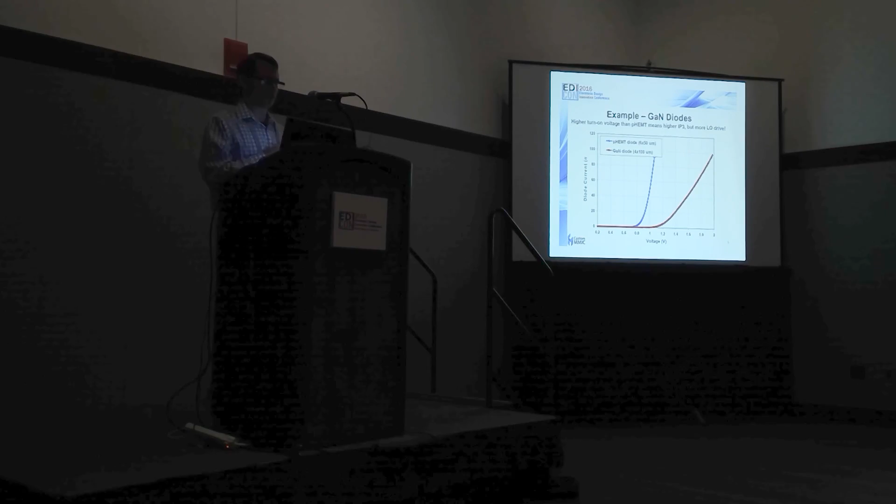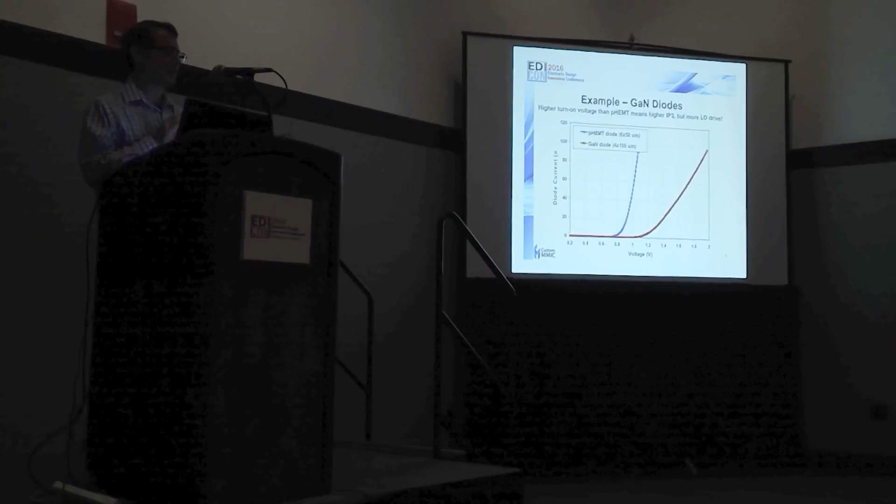So, one question briefly is, why is gallium nitride so much better than what we're used to, which would typically be GaAs PHEMT in the III-V world? As an example, take a look at the typical IV curve of some diodes, and we can see some physical reasons why GaN is so much better. On this IV curve, the blue one is a typical PHEMT diode. This is a 300 micron device that we put through the IV tracer. It has a turn-on voltage of about 0.75, 0.8 volts, where the current really starts going through the diode. That's fairly typical of most PHEMT processes. You can move that turn-on point a little bit, but you're pretty much around 0.6, 0.7, 0.8 volts.

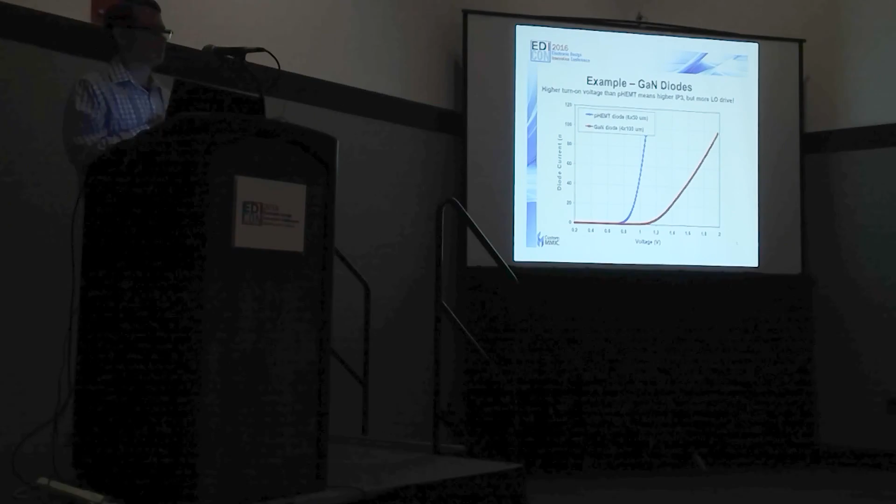GaN, on the other hand, is a little bit higher. The red curve represents a typical GaN diode from one of the processes we use. This is a 400 micron total periphery. Both of these are fairly big, but chosen just to give nice current values. This one turns on around 1.1 volts, so about 30 or 40% higher than a typical PHEMT diode. The GaN will turn on, and it has a much different slope. So the diode, from a physical perspective, looks a lot different. From an electrical perspective, there are some differences going on here. It's not just a slightly tuned GaAs diode. It is really its own unique element.

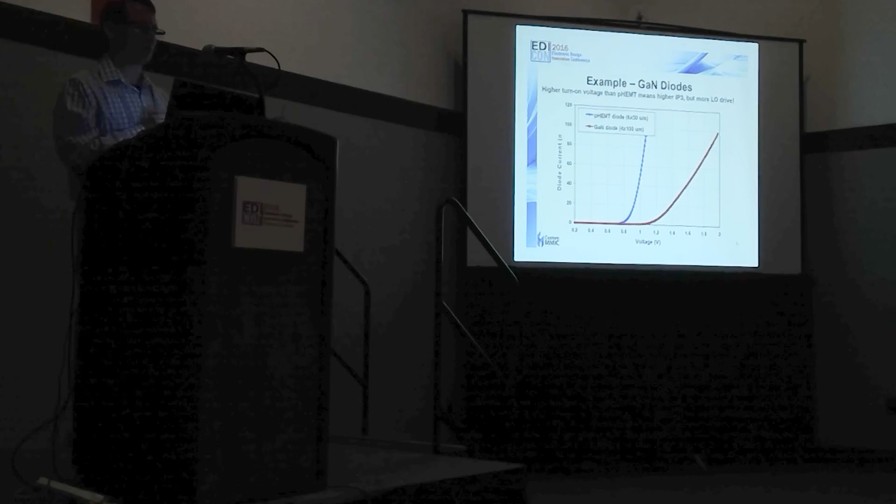And the higher turn-on voltage, we'll see, does lead to higher IP3, but it also means more LO drive. So nothing is free, and certainly in gallium nitride, that is where we pay the price. It's the LO drive.

So a few months ago, back at the IMS in San Francisco, I was fortunate to give a MicroApps on some of the GaN mixers we've done at Custom MMIC, and that was really our second generation GaN mixers where we got input IP3 levels around 30 to 33 dBm pretty consistently. I'm happy to say that what we'll be looking at here today is our third generation set of designs, and we've really exceeded that IP3 level by quite a bit.

So again, the results here have not been shown outside. This is not really just a repeat of the MicroApps. This is some brand new data. And I'd like to take a look at really 3 examples of some mixers we've done on this third generation. The first is an S-band FET mixer using the 3-terminal device, the cold FET. The second is an X-band double balanced diode-based mixer. So again, looking at a 2-terminal device.

And then finally, a high-frequency Ku-band GaN FET mixer, again, using the 3-terminal device. So we have two 3-terminal devices and 1 diode-based mixer. And these were all fabricated on the same process. This is a US-based commercial GaN process.

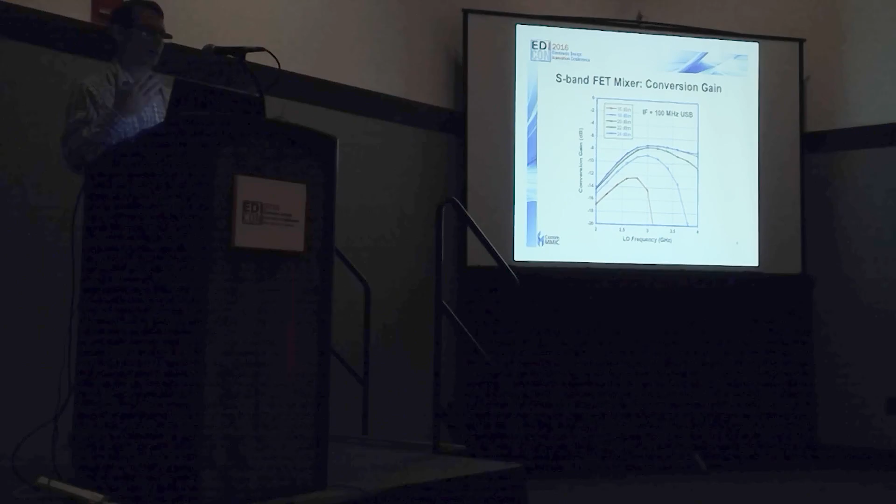And we approach conversion gain levels of about 7 or 8 dB, which is quite commensurate with what you would see in a GaAs pHEMT design. So we're not losing a lot in terms of conversion loss by going to GaN. But the one thing we do see is we need quite a bit of LO drive, whereas a typical GaAs passive mixer might need 15, 18 dBm. We are well above that. And indeed, this mixer saturates above 20 dBm LO drive. So we need some power. That is the trade-off we make with GaN, but the hope is that we get a little bit more efficiency.

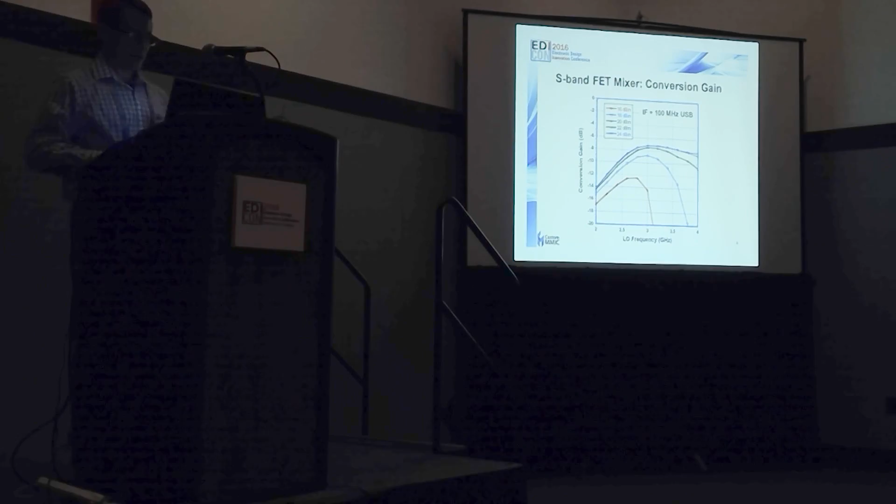So in terms of how we did there, if we look at the input IP3, this is the same idea, down converter, a fixed IF of 100 megahertz, upper sideband, sweeping the LO frequency and looking at a bunch of different power levels. We see that our input IP3 is quite high, between 35 and 40, sometimes eclipsing 40 dBm, across the 1 gigahertz bandwidth, which is very nice.

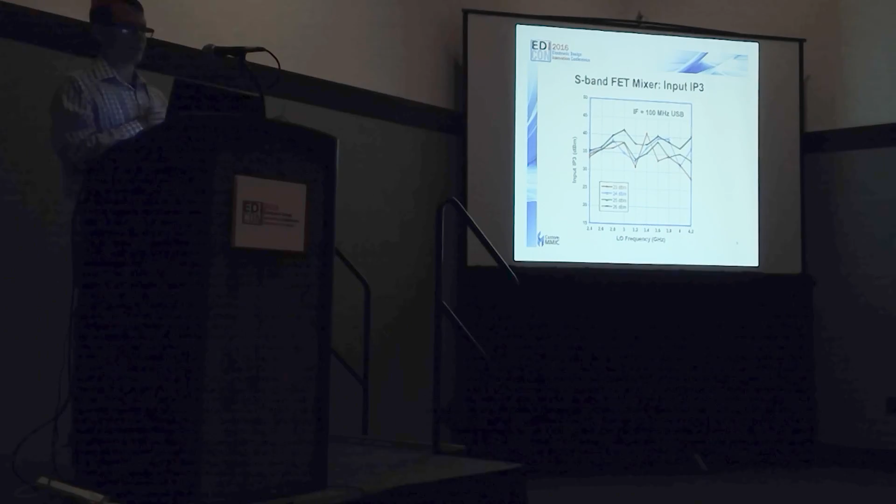And if we think about linear efficiency, for most mixers the input IP3 is around what the LO drive level is, maybe a couple dB higher. Here our IP3 is about 8 to 10 to 12 dB above our LO drive. So we've got some nice linear efficiency going on. So we do have to drive this mixer quite hard, but we get the benefit back of very, very high input IP3s. It's always a trade-off, but that's a nice trade-off to have. Yes, we've increased the LO drive, but we've gotten a lot more bang for our IP3 buck.

So the second one to look at is an X-band double balanced diode mixer. This was designed really to cover an RF bandwidth of about 7 to 13 gigahertz with an IF response, again, DC to 1.5 gigahertz for this particular project.

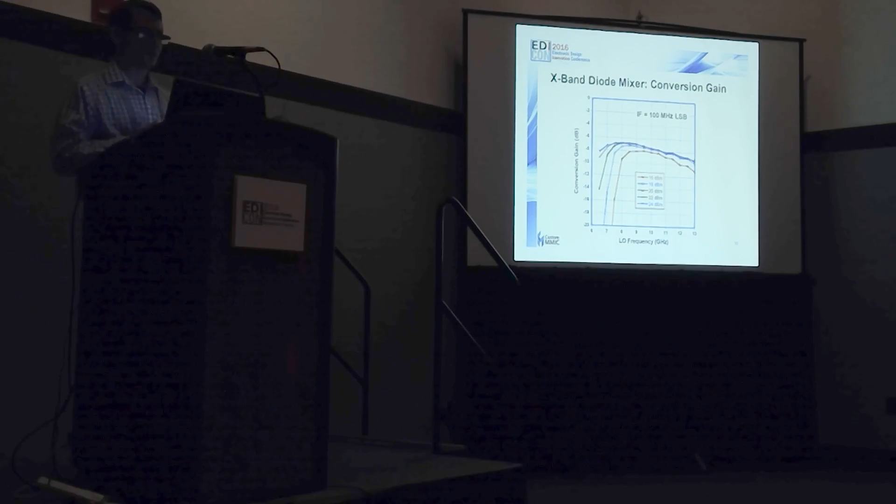But what we do notice, again, our conversion gain saturates at much higher LO drives than we're typically used to seeing for a GaAs pHEMT-based passive mixer. We have to drive this about 20 dBm or higher to get the nice flat saturated conversion gain. So with the FET, we saw a high LO drive, and the same thing with the diode, but we expected that, and the hope is that we did get some payoff. And indeed, in terms of the input IP3, the linearity, we did see that payoff.

So here, again, same conditions, sweep the LO frequency, fix the IF at 100 megahertz lower sideband for a down converter. What we see for our input IP3 is typically between 30 and about 38 dBm across the band. We get a nice about 2 gig bandwidth where that IP3 really peaked up. And if we drive it at 26, 27 dBm, we're approaching 40 dBm input IP3 for a diode mixer,

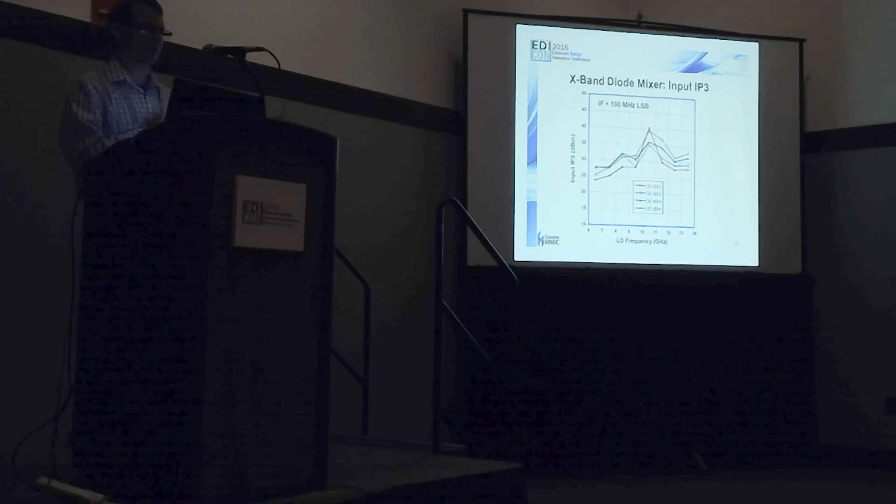which is very good. It's obviously not across the full band, but this, like I said, was our third generation, and we've increased this from our second generation by about 8 dB. So the hope is to flatten this out and get this even higher, but it's certainly a nice start.

So there's no balance here. There's no transformers. We got rid of the spiral transformer diplexer and just went with a low-pass, high-pass filter kind of diplexer. And that's really where we get our isolations from. There's no inherent balance here, so isolations are really provided by those on-chip elements, the spiral inductors and the capacitors.

So first, to take a look at the bandwidth, again, we have the conversion gain here as a down converter, sweeping the LO 13 to 19 gigahertz, 100 megahertz IF frequency upper sideband. And what we see is when we get up to finally close to being saturated, we're getting about 9 or 10 dB conversion loss, so a little bit higher than the previous two mixers.

And that's really a consequence of having to use a smaller device at these frequencies. As the frequency goes up, these mixing devices want to get smaller to handle the bandwidth, and when they get smaller, they have higher resistance values, so that comes into play here with the conversion gain.

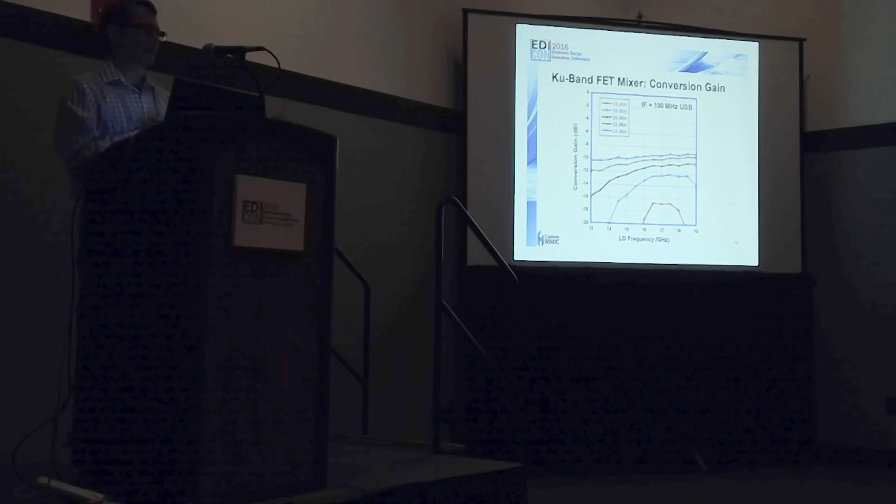But we do see that very nice flat response as we drive it hard enough. We drove this up to 24 dBm. I would have liked to have gone higher, but our lab equipment kind of stopped there. So generating power at those frequencies in the lab can always be a challenge. So I think if you could drive this a little bit harder, maybe up to 27 dBm, you might get flat 8.5, 9 dB conversion loss across the band. But we certainly have not

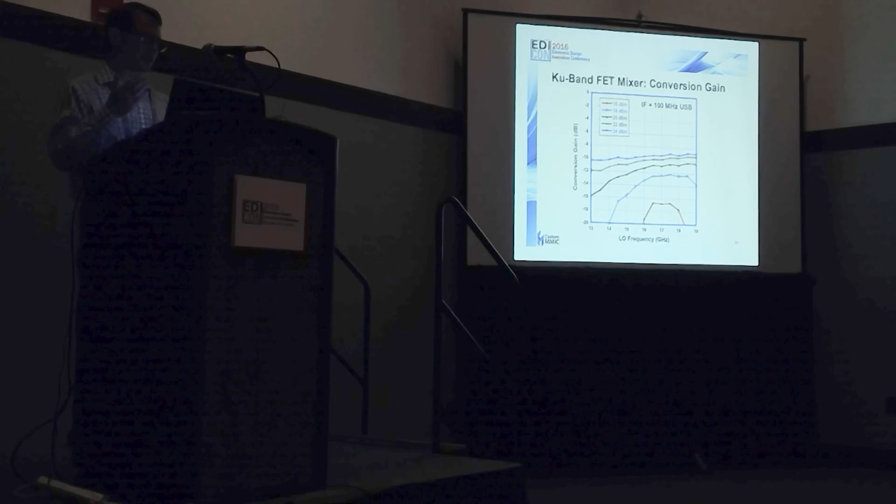saturated this. Then in terms of the input IP3, we see a very similar looking curve to the conversion gain, again over the same LO frequency range. As we drive it harder, that input IP3 just keeps creeping up to about 33 to 35 dBm across the band, giving us again a nice linear efficiency of about 8, 9 dB above the LO drive. So again, driven pretty hard at 26 dBm, but we get a lot of bang for that. We get up to 35 dBm for an input IP3.

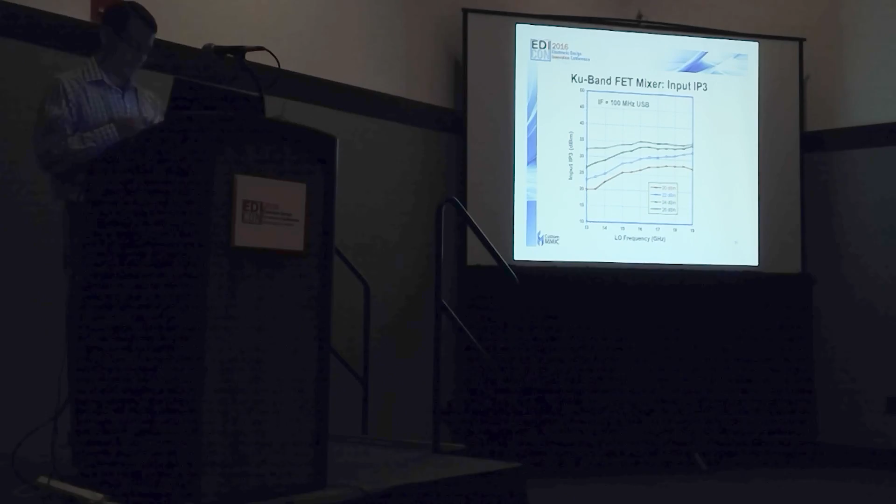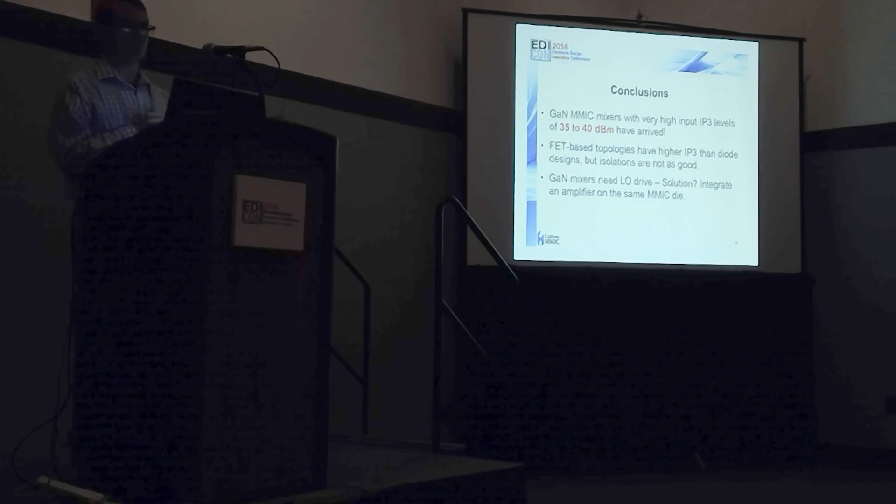So again, in conclusion here, what we like to think is that GaN has really offered passive mixers the chance to reset the bar for what input IP3 levels can be expected. About 10, 15 years ago, when I was designing mixers, the goal was really to get to input IP3s of 30. And a lot of people have done that, and now really what we hear a lot is, can we get to 40? 40 is the new 30. And we think the way to get there is with passive gallium nitride mixers.

In general, the FET-based, the 3-terminal mixing devices have higher IP3 than the diode designs, but the trade-off, again, is in isolations, which I didn't get to show, but I certainly have lots of data showing that the double balanced has the best isolations. It has a lot better spur performance, but the FET one will give you that raw intermodulation performance, which, again, in some applications, that's what you care about most.

So we mentioned everything comes at a price, and for the GaN mixers, the one thing they do need is LO drive. So the solution, which we're working on right now, is to take advantage of what the GaN process offers us, and that is a chance to make power amplifiers. So the idea is really to take our mixer and take a power amp or driver amp and marry the two up and generate a mixer that has reasonable LO drive levels, some on-chip amplification, and then the very high input IP3s. So that's kind of the next place to go. It's the next logical progression. And someday, maybe we'll say 50 is the new 40.

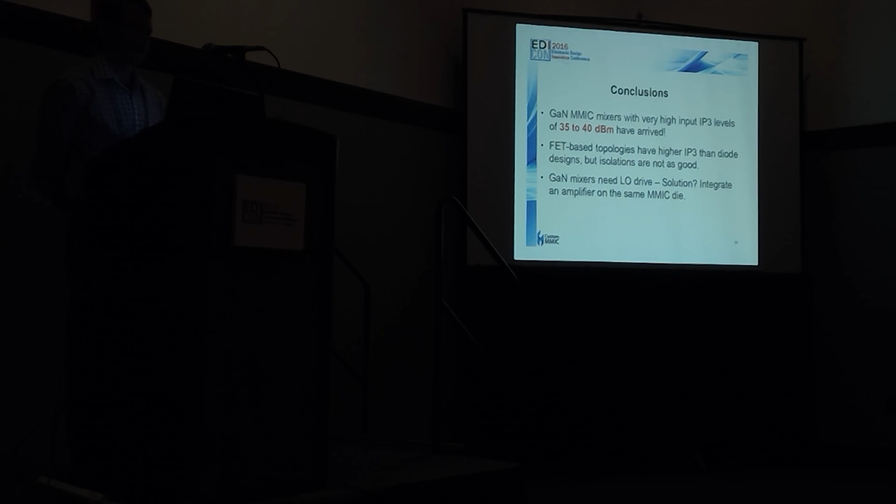Yes? Yeah, I had just a couple of questions. Sure. So on the diode one, you're still using a finger FET with, you said, the source and the drain shorted. Is there some advantage to retaining the finger FET transistor and trying to make it into a diode as opposed to a circular geometry or some other sort of geometry for the diode? The second question is on the modeling. You have a very low RF coming in. You have a very high 26 LO. Are you using small signal, large signal models? How do you handle the modeling?

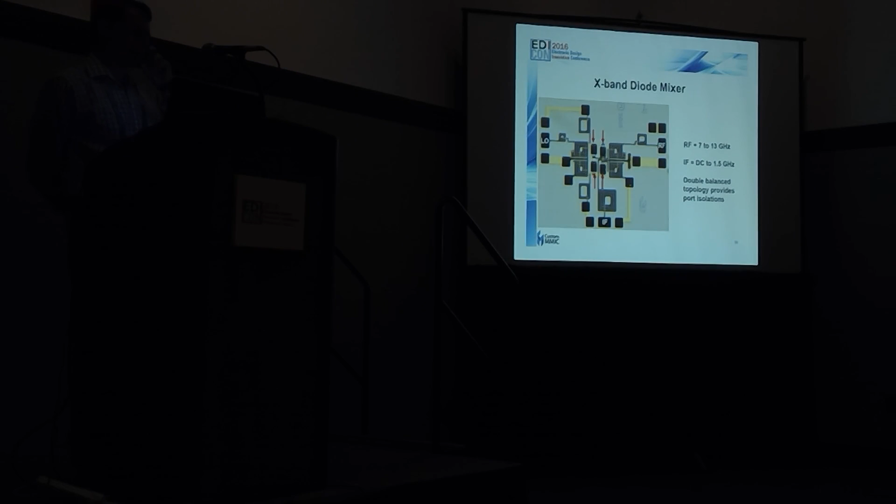Great question. So the first, on the physical makeup of the diode, we're at the mercy of the foundry. We're a fabless semiconductor house, so we contract out our manufacturing to the foundry, and they give us the rules about how they make their devices. So some foundries make diodes, vertical structure with the rectangular contact area. In this case, this is what the foundry says we can do. We're not allowed to do anything else. They certainly won't guarantee it. So this particular foundry makes FETs with gate stripes, and so that's how we make the

diode. In terms of simulation, we rely mostly on harmonic balance. So we use Agilent, or Keysight ADS, AWR is a similar tool, but you're right, it's harmonic balance. Small signal really gets you nowhere. In simulation, you have to go to harmonic balance and that kind of approach.

Really excellent paper. Thank you.

Just to continue that thought, I don't think I saw any simulation results. No, I did not put any. So how'd that go? You use the foundry PDK, right? Yes and no. For the FETs, we use the models that were provided by the foundry. For the diodes, I made my own. We had some test coupons, and I made my own model.

I didn't show it, but I've actually done a lot of backfitting on these, and we did very good. We got the bandwidths that we wanted on this. The IP3s actually came out a little bit better than we had simulated, certainly for the FET mixers. The problem with the PDK is we're not allowed to look at the FET model. It's just a black box, so we're at the mercy of what the foundry did.